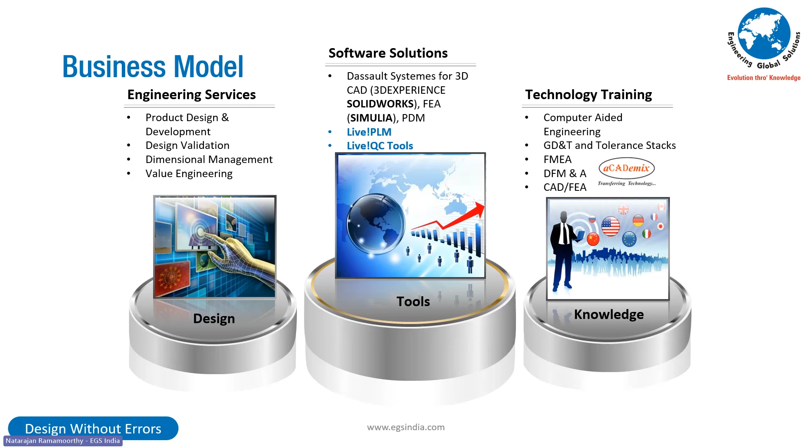Now, tributes to the architects of DoE would be the first thing we start with before we go through this presentation. One of the architects of the design of experiments is Professor C.R. Rao, who developed the theory of orthogonal arrays. He passed away last year at the age of 103. He used to give lectures at IIT Madras.

He was the person who institutionalized the theory of orthogonal arrays, subsequently used by Professor Genichi Taguchi. He won the International Prize in Statistics in 2023, just before he passed away, which is equivalent to the Nobel Prize.

He is a distinguished mathematician and statistician. DoE would be poor without his contributions. We pay our tributes to this legend in the field of mathematics and statistics from India.

We should be proud of Professor C.R. Rao, who retired and went to the US and settled there, continuing his professional excellence by teaching at Penn State University. He had a second career there after retiring from the Indian Statistical Institute, Kolkata.

The other person is Professor Genichi Taguchi, whose design of experiments is ubiquitous. There is an uncommon relationship between the two doyens. Professor Genichi Taguchi was introduced to the orthogonal arrays theory by Professor C.R. Rao during a sabbatical at ISI Kolkata.

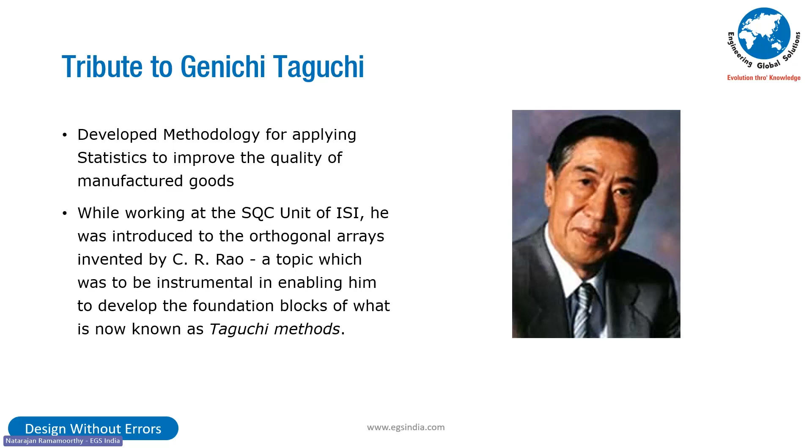With this tribute, let us go on further. The design process where DOE needs to be employed - we have been employing this in many products and technologies that we have developed for many customers in India and outside, whether it is the two-wheeler industry, four-wheeler industry, electric vehicle industry, the valve industry, the actuator industry, the Ministry of Defense, or any varied vertical segment we have worked in.

This is exactly the process we follow. If somebody asks us to do a root cause analysis for a failure, we follow the same process as well, and that's exactly where DOE finds its place. Nevertheless, this presentation is all about how to use DOE for the design and development of new products and technologies.

Quality and reliability are the two things which are mainstay in any product, and with these two being non-compromisable, the product lives to the expectation of the customer because quality and reliability paradigm are determined by the customer through the voice of the customer.

When you look at it, the DFMEA plays a significant part, the process enumeration, especially with regard to the FEA application. Why I am saying that is because DOE and FEA combined together will give you a very strong, potent, lethal application.

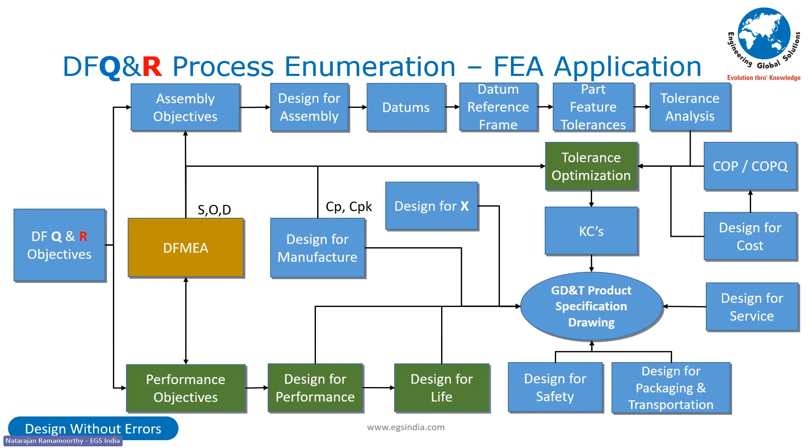Now, what is DOE? It's a design of experiment that consists of planning the experiments, conducting the experiments, analyzing the output of the experiments, interpreting it, and the controlled experiments to evaluate the factors that control the value of the parameters or a set of parameters.

So in other words, you have an input to a process, the process itself being defined, and the output or the outcome from the process. There are factors which influence the process and as a result, the output as well.

The controllable factors are the X's, while the uncontrollable factors like environment, corrosion, and so many other things are uncontrollable factors. When we are doing an experiment, we are doing it under controlled scenarios. We are looking at the controllable factors when we are putting this together.

So in other words, the parameters, the factors which influence the output in terms of the measurable parameters is what we look at in design of experiments.

So planning this, now when we are doing an experiment, it is too prohibitively expensive if we were to conduct the experiments using physical prototypes.

This is exactly where the computer-aided simulation tools come of use, because there everything is controlled under the controlled parameters. So in other words, the controlled experiments today can be done digitally as compared to doing it manually, physically with many prototypes.

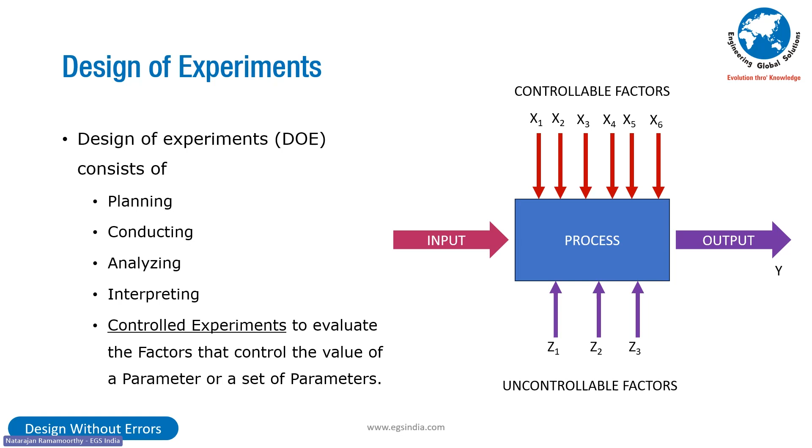Steps in DOE are: define the objective of the process. This needs to be very clear. Performance, return life, warranty, any which way you look at it. It could be a quality objective. It could be a reliability objective. Now you define the objective of the process.

Set the target value for the process performance measurement. Unless we set the target value, DOE is a fruitless exercise. And if possible, have it on a continuous scale so that you can monitor it.

Then you enumerate the design parameters that are affecting the process. As I told you earlier, specify the variation of each parameter in terms of levels. It could be high and low, high, median, low, any combination you want.

More the number of levels, more the number of experiments. Lesser the number of levels, more the interpolation between the levels. Are you with me? So it depends on the model that you choose.

Then you develop the orthogonal arrays for the parameter design with number and conditions for each experiment. Now conduct the experiments, now that you have put the plan together with the identified variables and factors, using the completed array, collect the data on effect of the performance measure.

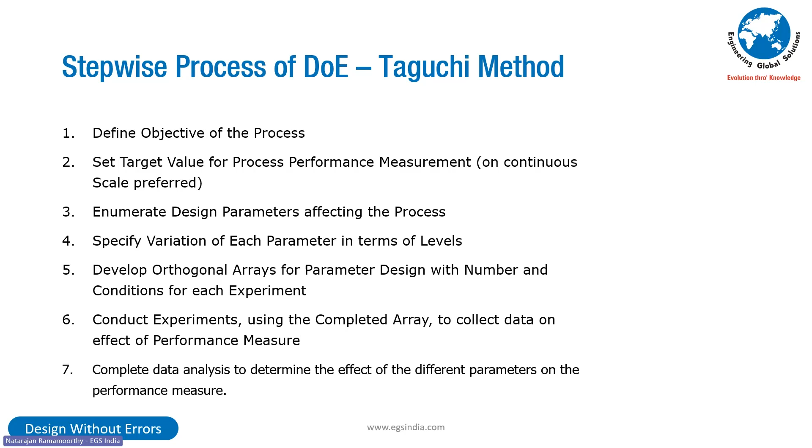Now, take the case of a pressure relief valve. The pressure relief valve has to activate itself when the threshold of a particular pressure has been achieved.

Now remember, these valves are not designed for discrete states of pressures. The pressure in the line continuously varies. When the pressure in the line varies, then using discrete values to come up with this would be a no-brainer, would lead to failures subsequently down the line. So the performance objectives have to have a range.

The factors have to have range. The parameters influencing the performance could be tolerances, preload, length of travel, or temperature.

For example, in this case, we design a pressure relief valve for room temperature. But what do we do? We start doing accelerated durability testing, say 5 Hz pressure variation, to test whether it works or not.

Now continuously applying 5 Hz or 10 Hz increases the heat in the system. You have a steel body, steel spring, steel plunger, copper washers, brass restraining element inside. You have a whole new can of worms because temperature now becomes important.

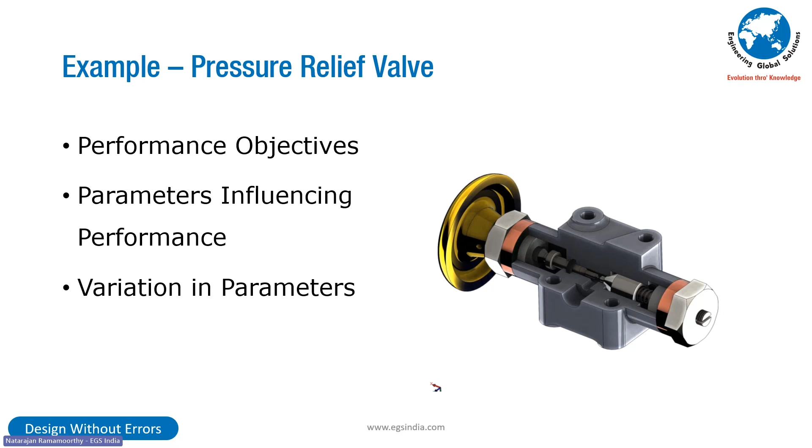This is exactly where DoE comes of use, folks. If we are looking at intellectual property development, if we want robust designs, DoE is the way to go. So if we have to do design without errors, DoE is the way to go.

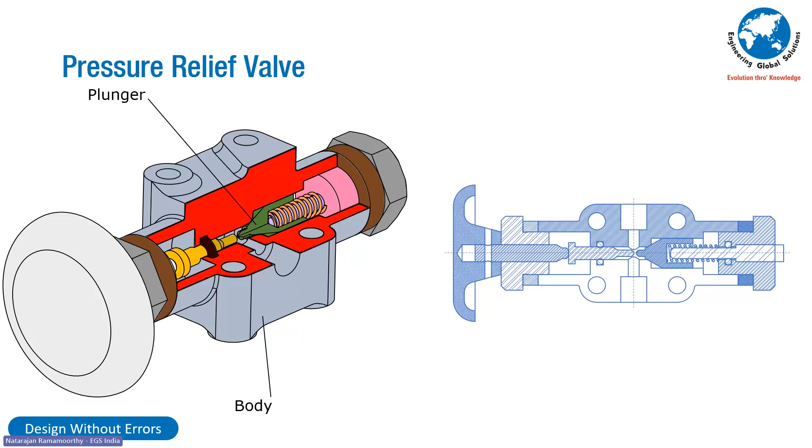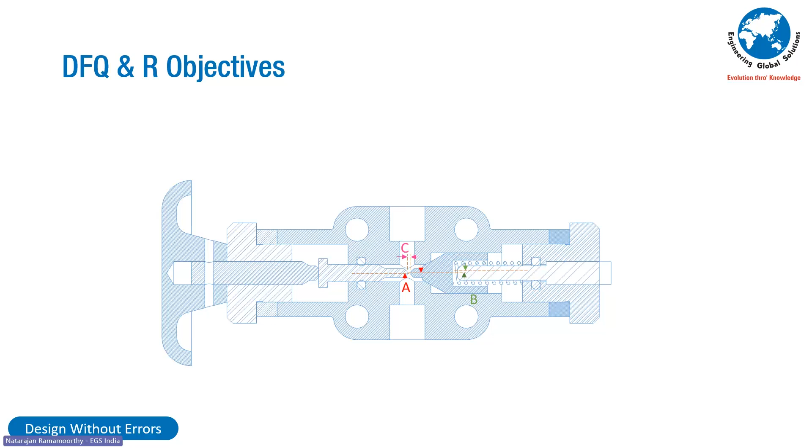You can look at the tolerances which are coming up in each and every one of them. You can look at multitudinous DFQ and R objectives, like for example the gap C, the misalignment A, leading to the misalignment in the spring. The misalignment in the spring leads to what? When the pulsation happens, the fluctuating stresses in the spring lead to premature breakage.

When it breaks, the spring breaks into two pieces. Now you have two springs in parallel, in series. The stiffness of that is not the same as the single element. The frequency goes all over the place.

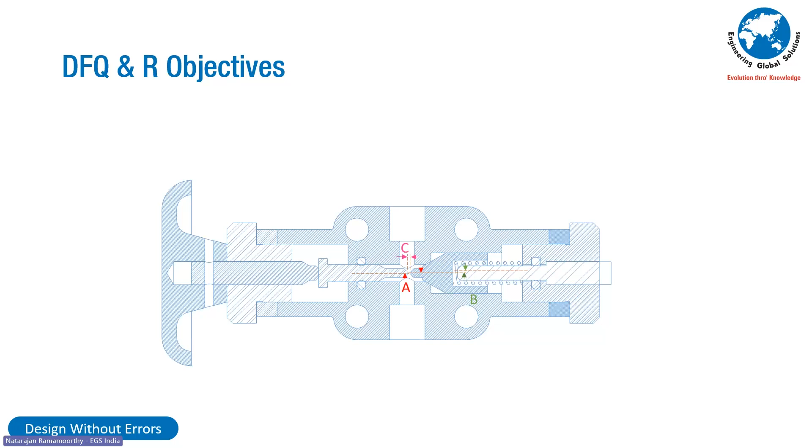So these kinds of what-if scenarios we need to look at upfront. The DFMEA covers that, drives that, verifies that, ensures that you avoid them, and the SOD is addressed in terms of parameters which we need to monitor.

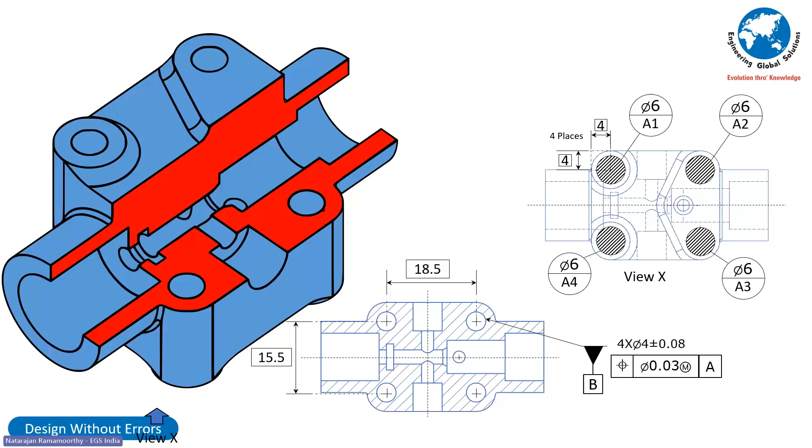Then we look at each and every one of the drawings that we are putting together, the GD&T drawings that we do for every one of them, and make sure that the values of the tolerances that we give, the sequence of assembly that we use, have to be in alignment with Q and R. Once we put this together, then we start looking at the evaluation of the part level tolerances at the assembly level.

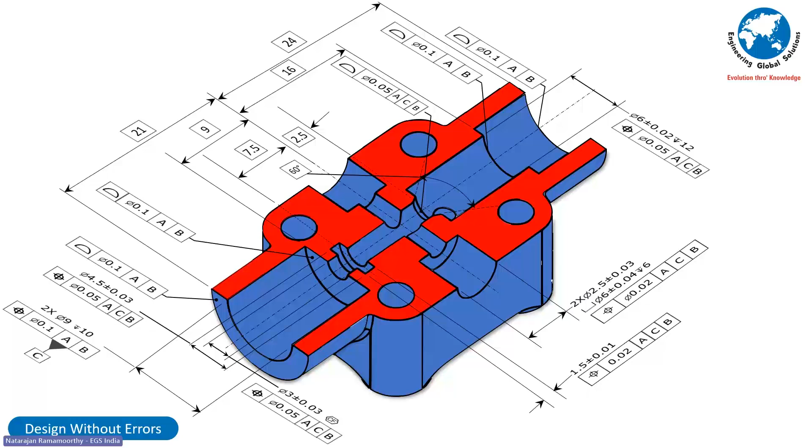So what you are looking at is the isometric view of the drawing that you would give to the customers, to the manufacturer to produce it. Now, if it is a supplier, you will be looking at the control parameters - they are control charts. If you are looking at independent parameters, then you will be looking at the scatter diagram to see the influencing coefficients. So many different ways to look at it.

The Taguchi's method concentrates on the median. Though other methods are there, this is very popular because it is easy to adopt, clear. The cost of poor quality, the loss function, is very clearly provided for, and it is easily deployable.

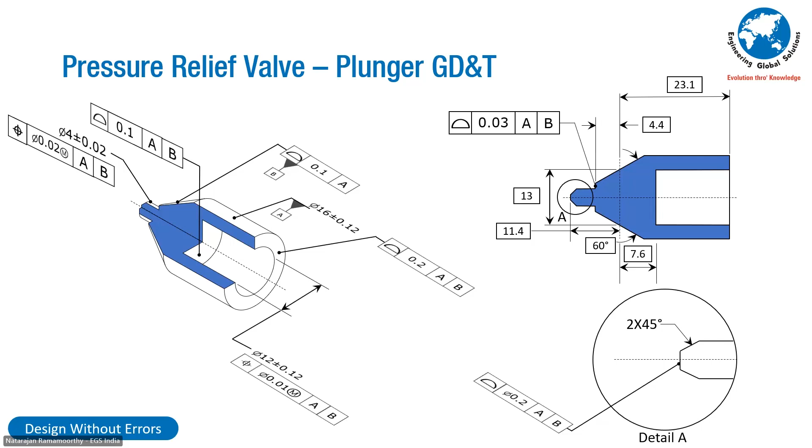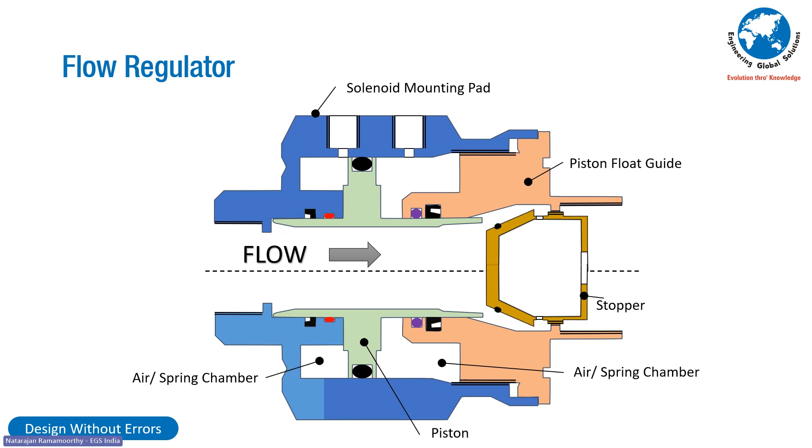The cross correlations between the factors on the mechanical side and the electrical side cannot be ignored. Again, DoE comes into picture. So you look at the partial drawings, you look at the significant contributors, you start delineating those drawings.

The setup is determined by the datum reference frames as mimicked by the sequence in assembly.

And then whether it is suppliers or in-house manufacturing, you will be in a position to look at the critical to quality parameters, and you will be able to gain information with regard to whether they are setting in the median of the specification limits, because the spread only helps you understand how far the sigma levels or the tail extends. The prerogative is to sit in the median.

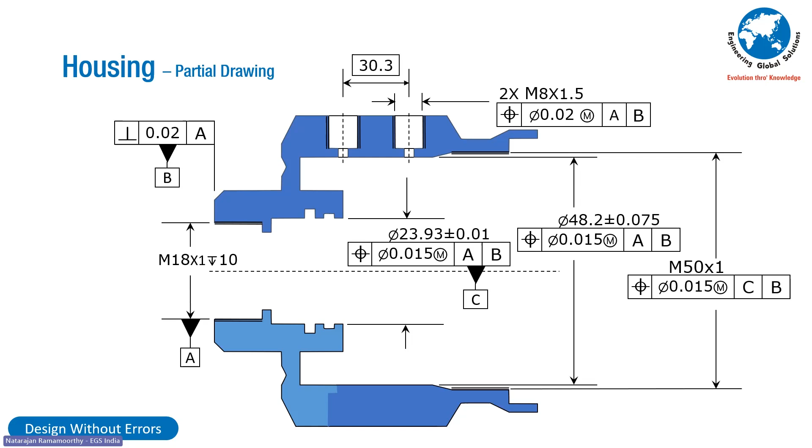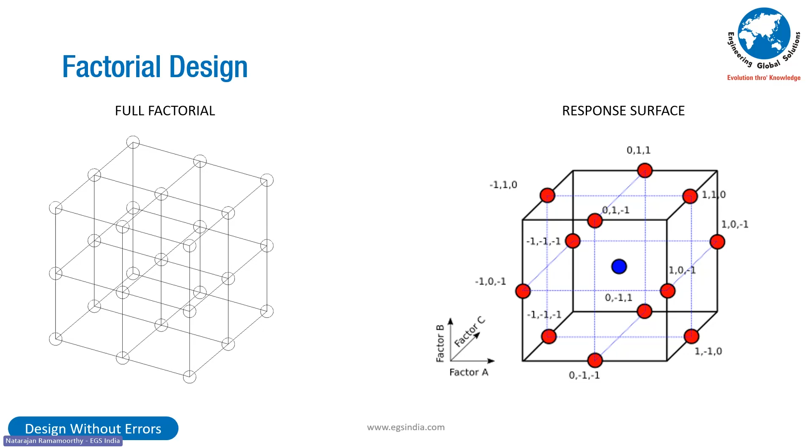Now, the tools that you can use while performing the DoE are the flowchart for delineating the parameters, the steps, and every step you will be monitoring the parameters, the input to the step, the output from the step, that you can monitor it.

Then you can look at the fishbone diagram for your cause and effect analysis, because this is exactly where we look at how the IPR gets into the product, the experience from our organization, from the people in the organization, the control charts for tracking parameters, the scatter diagram for the independence verification of the individual factors, because if there are interrelationships between the factors, this would come about.

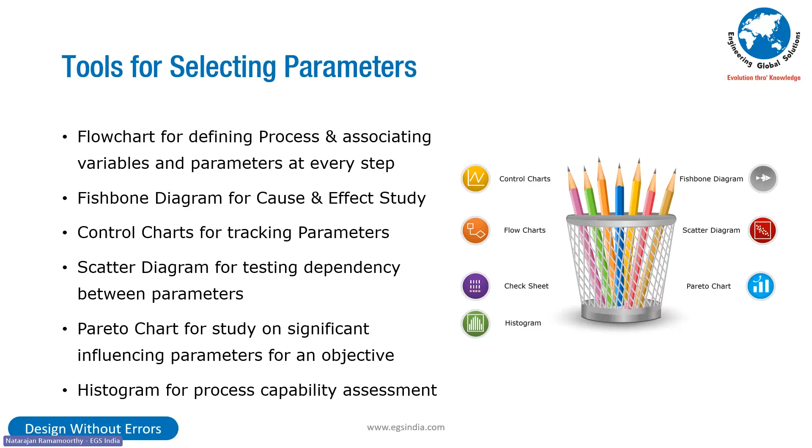Then the appropriate models have to be chosen for your analysis of the output data from the variables that you have chosen. And then the Pareto for the significance, and then the histogram to see the process capability assessment, to see if it is really performing within the specification limits and the control limits are in line.

So using CAE to conduct the experiments is cheaper as compared to putting this together in terms of physical testing, because the uncontrollable factors come into play in physical testing while they are literally absent when it comes to CAE based experiments. In CAE based experiments, the variations can be brought in together.

Nominally we do it only for the normal values, that is nominal values. But here you can bring the variations into picture. This is exactly where robust design comes into use.

So employ your 3D CAD topology already in use. Identify the parameters that influence the output. Enumerate the constraints that would help establish the non-trivial values for the design parameters. Establish the relationship between design parameters and output parameters using the CAE tools.

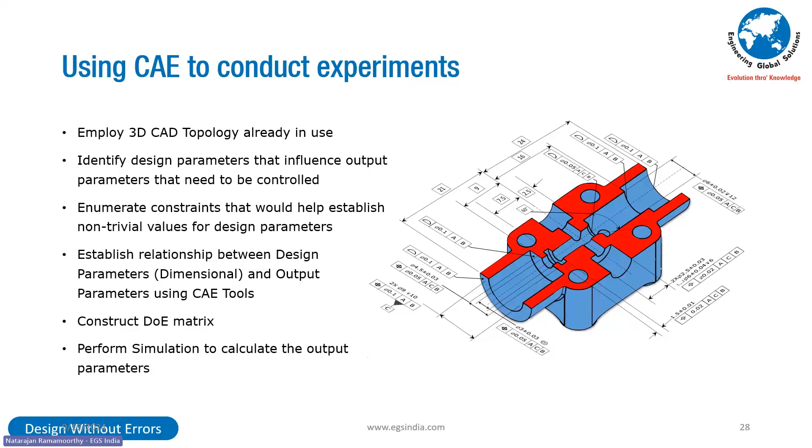Construct the DoE matrix and fill up the values using your simulation tools. It could be CFD, it could be FEA, it could be a combination, it could be multi-domain FEA, multi-physics problems. Perform the simulation to calculate the output parameters.

Now, how good is your DoE value depends on how you have established your correlation between your FEA and CFD with respect to experimental values. This is where the procedure of the FEA comes into focus. This needs to be controlled. This needs to be delineated very clearly.

Once this procedure has been put together, it is a question of repeatedly using these procedures for different factors, varying those factors and getting your outputs and results.

At EGS, we have been working with a lot of different customers in establishing correlations, whether it is frequency, life, predicting the failure modes faced in the field, or doing a root cause analysis after a failure has occurred, crossing 500 hours. Imagine how much money you have to spend to test something for 500 hours. At the end of the testing, what do you have? A failed specimen. You only have a conjecture with regard to what could have been the reason for the failure. Is it a one-of-a-kind failure or a predictive failure with regard to ductile yielding? We do not know. We can only have certain confidence levels.

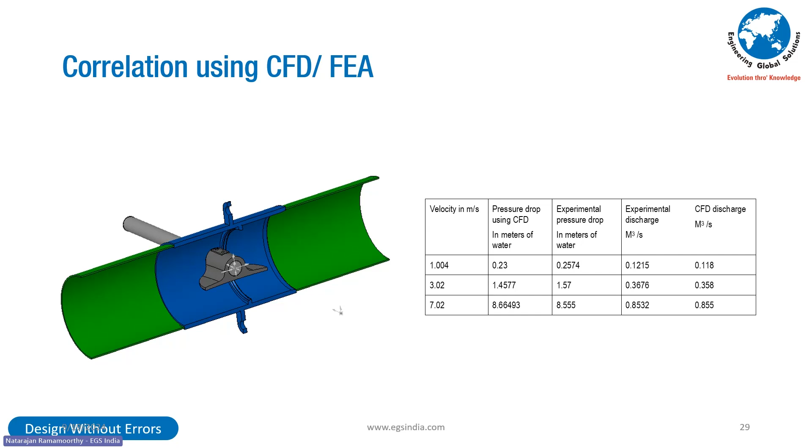Now, in the R factored design, when we are looking at life calculations, you will see the cycles to failure and the amplitude as given in the design textbooks. But when you look at the actual amplitude, one of the parameters you'll be using is the material parameters. So if the material parameter has a tensile strength varying between two values, the yield strength varying between two values, the Poisson's ratio varying between two values - Poisson's ratio, people really don't pay attention to. That tells you the crystalline structure inside, and also helps you look at the ductile yielding before failure. It's a very important parameter. It is not used, it is just assumed.

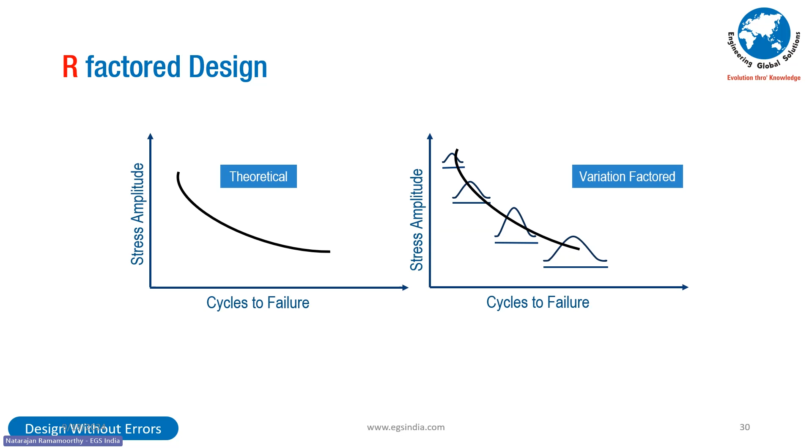It's a huge thing. So when you look at every one of these areas, you will see that there is a variance, a distribution as shown on the right side. These can be factored in your DoE.

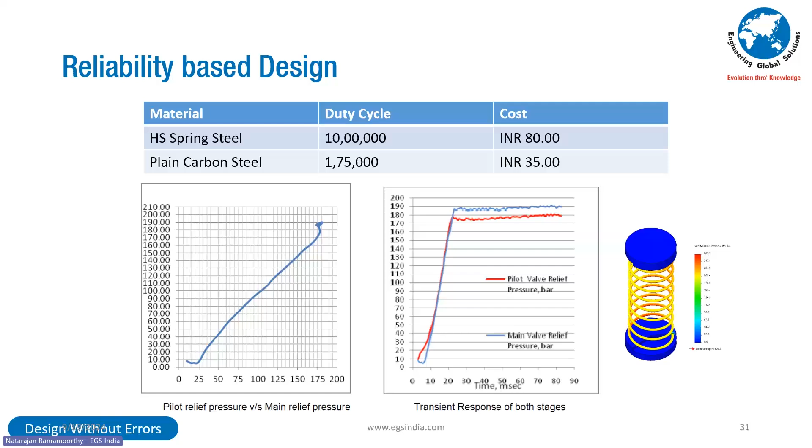So for example, you look at this pilot relief pressure versus the main relief pressure, looking at the values, response time, and you look at the duty cycle, you look at the cost of poor quality that comes into picture. If you choose the cheaper one, 175,000 cycles, while the other one is 1,000,000 cycles, it depends on your service life expectancy and your parameters as your objectives.

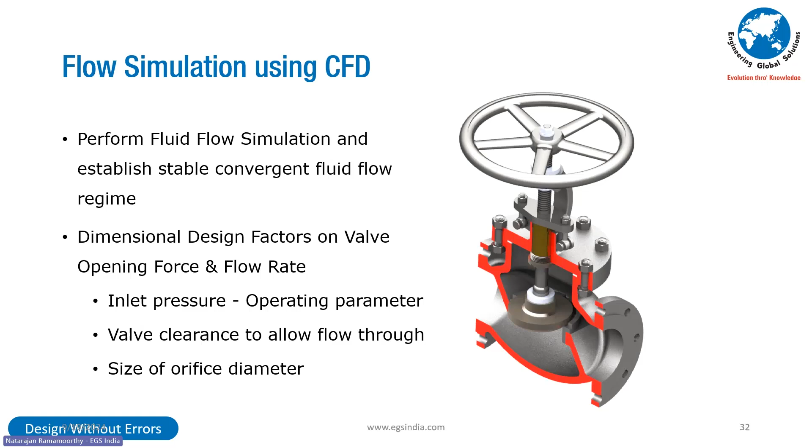Now let us look at a simple example of a valve wherein we are looking at the flow values and the dimensional design factors to be sized for the inlet pressure, the valve clearance to allow the fluid to flow through, and the size of the orifice diameter. These are the three parameters.

Minimum force is required to open the valve. Maximum volumetric flow rate is required. So one is minimizing, one is maximizing, and the output response will be mapped using quadratic regression. Why? Because we are using the response surface method, the factorial fractional factorials.

So the factors are valve opening clearance - that value will be given in millimeters with a plus or minus value. Orifice diameter, flow through the valve, plus or minus. Inlet pressure, again a value with variations, line pressure variation. The output is the force required to open the valve.

Remember, we do finite element analysis in discrete states. But what we are looking at is continuous variation, not discrete alone. This is where DoE comes of use later on with contour plots. The volumetric flow rate is one of the output variables.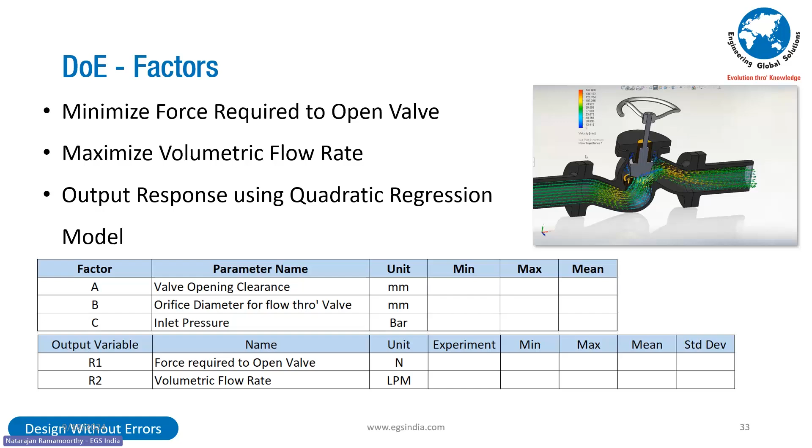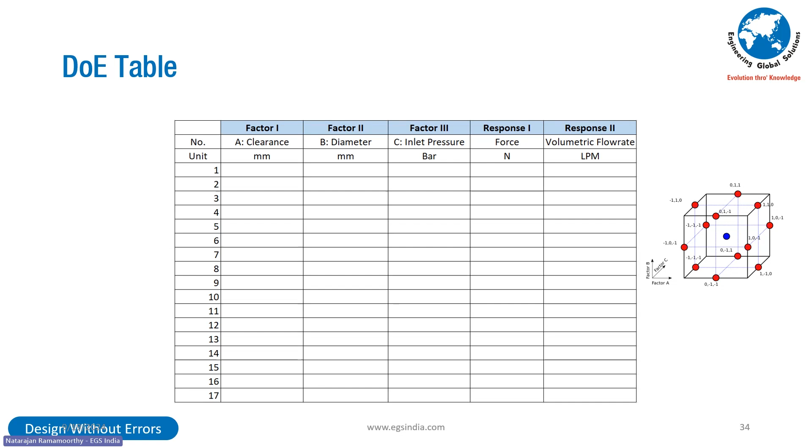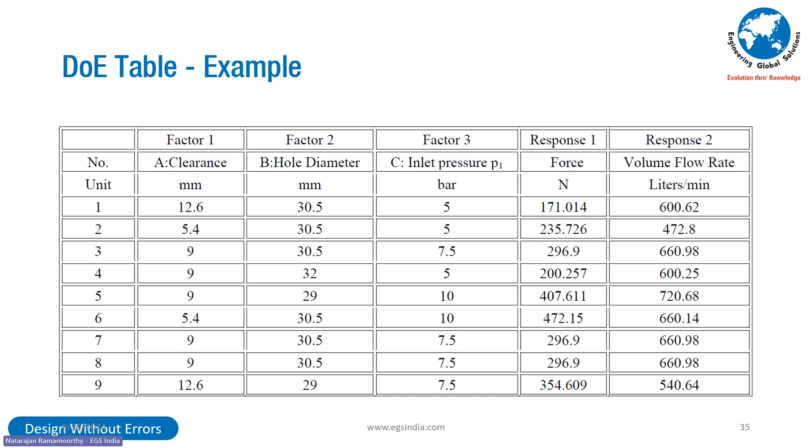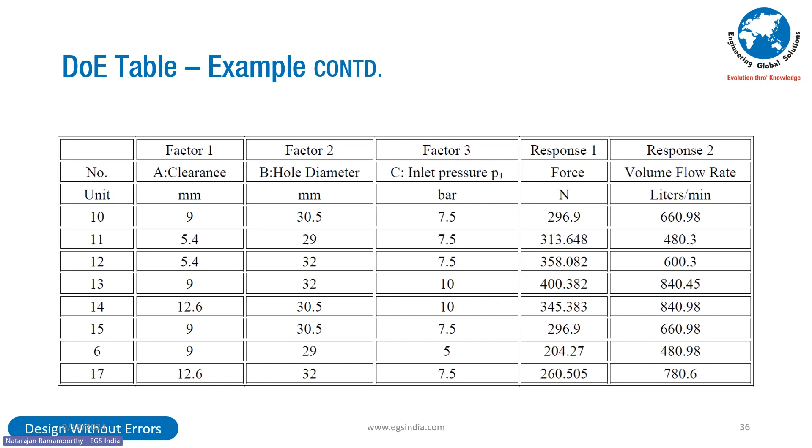So when we look at all these, we put the three parameters together, we put the two responses together, develop the finite element analysis procedure or the CFD procedure, and then we look at conducting the experiments. In this particular case, we will be looking at 16 to 17 parameters, and we do the analysis. We start looking at the results. We populate the table. Once we populate the table, we get the response forces and the volumetric flow rate for the different values as enumerated by the designer.

Now for the DoE process, we use the Box-Behnken design, response surface modeling, one of the methods used. It allows the quadratic regression model without limiting the number of experiments. ANOVA method is used for the valve opening force calculations as shown on the right side. The optimal values of the inputs or the factors are arrived at based on regression.

You see how beautiful this is? So in the design space, DoE helps you arrive at the parameters, the nominal value of the parameters, the effect of the deviation from the nominal value towards the extremum, and their influence on the overall performance is clearly given here based on DoE.

With simultaneous application of multiple factors coming into place, not one factor at a time, which is expensive—this is the power of DoE. It helps you come up with the optimality of the values. Later, if a customer wants a change in design, you can look at the performance characteristics, change the parameters, conduct this and automate the process so that you get the results very beautifully.

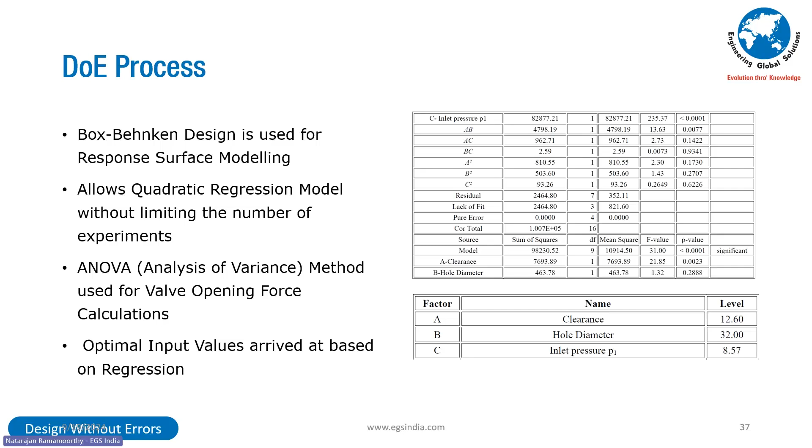The benefit of this approach is that quality should be designed into a product, not inspected into it. Quality is not only for inspection—it has to be institutionalized inside the product at the design stage itself. This is what Taguchi said. If we're looking at first-time-right products, we come up with this process institutionalized inside the organization and get the benefits out of it.

Instead of using conjectures in root cause analysis, you have definitive contributions from the parameters used in the 7 tools I told you earlier. So it is not person specific, it is process centric—a clear understanding of cause and effect. This strengthens product IPR, especially with Make in India and Atmanirbhar Bharat. This is possible only if we put these parameters together in proper perspective and develop products and technologies in this country using the know-what and know-how approach.

This is what will help the country in the long run, not paper-to-product manufacturing alone, but development of the drawing paper itself. Anybody can manufacture to a print, but developing the print requires a huge amount of discipline in terms of processes. That is what DoE gives you a thrust upon. Consistency in quality and reliability can be achieved by design upfront if DoE is used as a mainstream part of every product development before we sign off on the drawings.

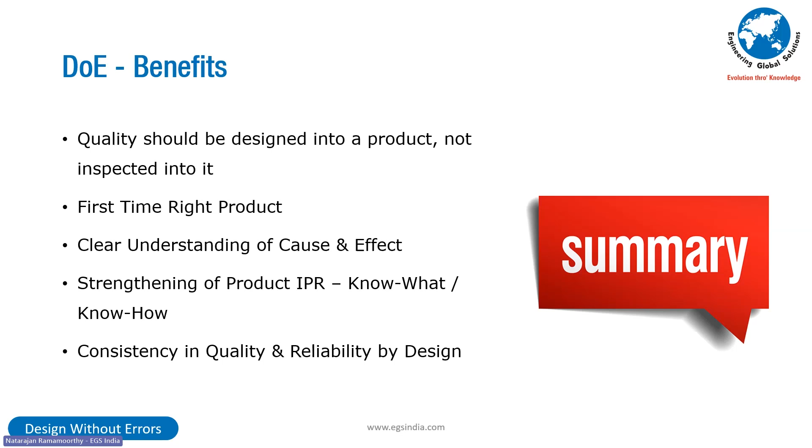We tried to reduce the costs, but the problem is the cost of poor quality after the issue has been reported by the customer is so huge that it can either wipe out the product or the company. So if design people want to build confidence into their designs, and want customers to appreciate the robustness of their designs, they have to institutionalize this as part of their design and development process. With that, we conclude the presentation now.